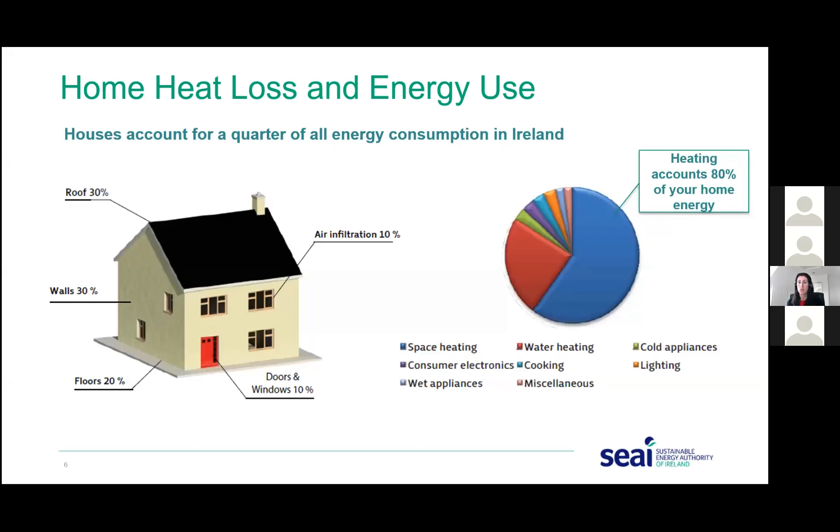In a house with uninsulated attics and walls and underperforming doors and windows, heating accounts for 80% of your home energy. If you have an uninsulated home, you're losing up to 30% of your valuable heat through uninsulated roofs and walls, and a further 10 to 20% through uninsulated floors and underperforming doors and windows.

So you're probably asking, why do I want to do a home energy upgrade? What's in it for me? Well, the number one factor is comfort.

By insulating your home, you're going to make it much warmer and cozier, and you're going to have a healthier living environment. Also, by adding renewables, you're moving to cleaner, more sustainable energy, and all of this is going to have a really positive impact on your pockets.

By really well insulating your home, you're not going to have your heat on as often, so you're reducing your energy bills. As well as that, you're having a positive impact on the environment because you're reducing your home's carbon footprint.

All of this, like with any home upgrade, is going to add value to your home. Even in terms of an energy upgrade, you're improving your BER rating, and that's going to increase the value of your home.

We're often asked by homeowners who don't know where to start, what are the steps to a home energy upgrade? First of all, if you really don't know where to start, it's an assessment. Then it's insulation. And then the third step is adding renewables. I'll go through those in a bit more detail.

So assessment, as I said, if you don't know where to start but you have a cold home that's uninsulated and you want to do something about it, get a BER assessment done on your home. This is the best way for you to find out how your home is performing in terms of energy efficiency and what you can do to improve it.

After the assessment, which is non-intrusive, you're going to get a personalized advisory report. That's going to help you understand the types of energy upgrades best suited for your home, and also the available grants that will help you along your home energy upgrade journey. It's going to provide you with a roadmap to achieving a minimum B2 BER rating.

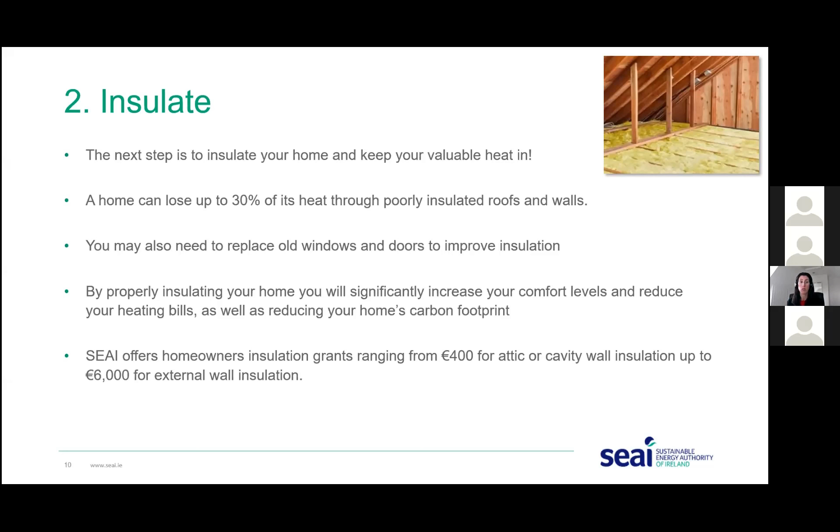And there's a full list of that on our website.

So when you do have a really well insulated home, then you need to consider adding renewable technologies. Renewable technologies are going to further reduce your energy bills and improve the BER rating of your home. It's also supporting that move away from fossil fuels, so you're reducing your home's carbon footprint.

So one of the popular ones that I'm sure you've heard of now are heat pump systems. They're a really good alternative to fossil fuel oil and gas boilers, and they're highly efficient.

And then you can also look at solar PV for generating your own electricity, and that's going to reduce your bills roughly between 200 to 300 euro per year. Obviously, it depends on your energy use, the number of people in the house, the size of the house, so that's an approximation. And then solar thermal for hot water is designed to meet about 50 to 60% of your overall hot water demand.

So all the time, it's reducing your energy bills, moving you towards cleaner energy sources, and again, increasing the value of your house and improving your BER rating.

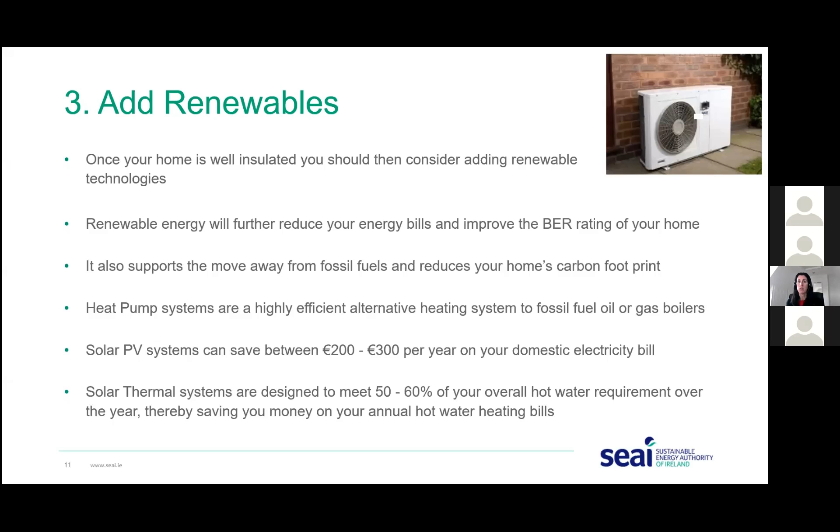So the SEAI offers various routes to getting a home energy upgrade grant. This is to suit homeowners' different needs and requirements.

We do have a free energy upgrade route, and that's for qualifying homeowners that are in receipt of certain welfare payments. There's a list on our website, but it includes the likes of the fuel allowance, domiciliary care allowance, the carers allowance. So do have a look and see if you qualify for that. As I said, it's fully funded by the SEAI, and we manage that entire service.

So what we do is we'll send out somebody to do a home survey, and they'll determine what energy upgrades are required in the home. We always look at insulation first, so it will be looking at your attic space, your walls, and to see what insulation is required.

Case by case, we do look at windows and heating systems, and if we see that there's single glazed windows or there's no heating system, that will be addressed, but it is very much case by case. We assign the contractor to carry out the works, and then we do a follow-up BER. Doing the post-works BER is important to make sure that the grants are achieving their purpose and that they're improving the energy rating of the homes.

Now, if you don't qualify under that route, then we have two other routes. We have what's called the One Stop Shop service. This is a complete home energy upgrade solution. If you actually want to do multiple energy upgrades in one go, it's usually fairly daunting and homeowners like a bit of support, this is probably the option for you.

It's part funded by SEAI, so it covers roughly a third of the cost of works. And the one-stop shop will fully manage the entire project from start to finish, and that includes the grant application.

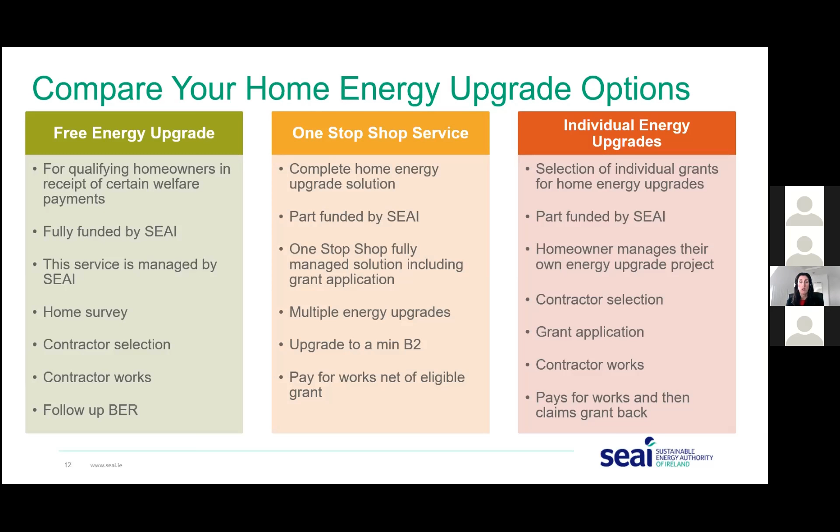You have 8 months to get all the works completed, fill in your paperwork, send it back to us. And once the works are completed, you then claim the grant. So that's the difference. It's really to have those three different routes there to support homeowners depending on their budgets, their situation, and what they want to achieve.

So under the three routes, this just gives you an idea of the various energy upgrades that are available. If I look at the one-stop shop service first, you'll see that it's the full range. Now you can choose what you want, but just to say you do need to meet the B2 requirements.

The one-stop shop will carry out a home energy assessment, including a pre-BER and a further assessment to give you a full plan on what's required to meet that B2. It looks after project management, and then the full range of insulation, whether you want to go the heat pump system and add your renewables. Ventilation is key as you get to a higher BER, to make sure you've got good, healthy ventilation going through the house. So the one-stop shop service covers the whole lot.

Free energy upgrades, again, we do a home energy assessment. It's not a BER, it's a home survey to see what upgrades are required. It fundamentally looks at insulation, number one, and then it'll address certain things like windows and heating systems on a case by case basis.

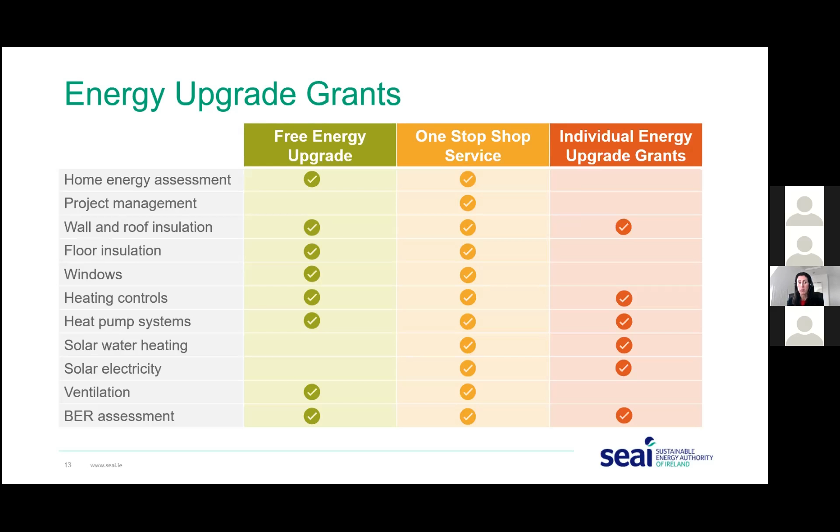And then you have a smaller range of individual energy upgrades, and again, it's covering your insulation, your attic, your wall insulation. Then you can choose whether you want to improve your existing boiler by adding heating controls, or if you want to go down the renewable technology route, you can add your heat pump or your solar thermal and your solar PV.

So to date, we've had over 450,000 homeowners go through the home energy upgrade journey with grants from SEAI. It's really all about making your home comfortable, cozier, reducing those energy bills, increasing the value of your home, and naturally improving your carbon footprint.

So I'll just finish off by saying there's a lot of information there. We've actually got a new landing page on our website: seai.ie/home energy upgrades. There's a huge amount of information to guide you through your home energy upgrade journey and through the details of the different grant routes available, with links to the various one-stop shops and registered contractors. Plus we have a team there, so if you have any questions, give them a call and they can talk you through it.

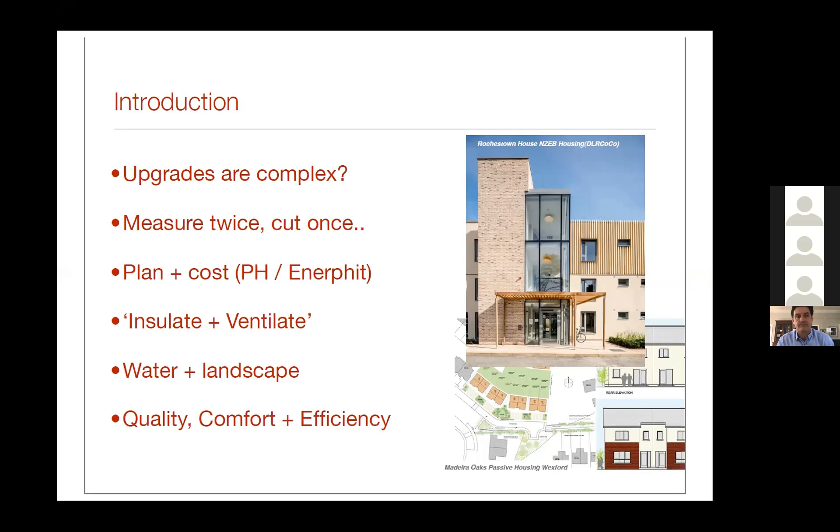So if we go on to the next slide, broadly speaking, in terms of retrofit projects, the supports from the SEAI are excellent. The OneStop Shop initiative is very, very good. When you're coming to manage a project yourself, it gets trickier because you have to negotiate the grants, do tendering and procurement, getting the right contractors. How do you do it?

I'd suggest that, the passive standard, that image there is the passive standard. It's 30 years old. So basically we have a standard that's been operating at this really, really low energy level, helping design buildings for 30 years. It's been audited, measured, double checked.

There's no performance gap. Now the suite of design aids you have here for your design team is absolutely brilliant. When you model this, the modeling done for the passive house system is very exact and very rigorous. To actually use the modeling and systems they have is a massive benefit to any design team or anyone doing a project.

Even if you're not going for the standard, it doesn't matter. But if it says you're going to use a certain amount of energy after doing X, Y, and Z, there's no performance gap at all.

So for larger projects, I would absolutely get your passive house modeling done. And if you have your own design team, your own architect, engineers, quantity surveyors, etc. doing your project, getting a passive house consultant involved is probably less than 1% of your construction costs. So it's negligible here, but it's a brilliant aid to tell you exactly how this is going to work.

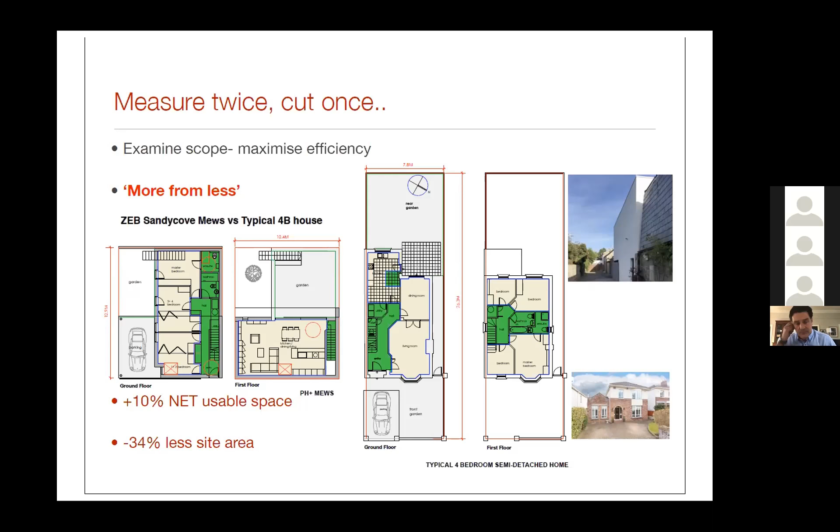It's really important, particularly for extensions, to make sure your scope is right. Don't build the biggest thing you want - build the most efficient thing you can on your site.

There's a couple of headings people normally look at. This is a view from the upper floor roof terrace, which faces south - you can see we have a very large south-facing glazing screen there. The main garden space on this was upstairs in this enclosed courtyard. There's effectively no - the ground floor courtyard bedrooms look into it, and there's a car parking space, and the upstairs amenity space is upstairs here.

One other aspect in terms of design was I was very keen to see how far we could go on a really tight urban site, so there's no compromise really on aesthetics - the renewables here are almost invisible as well. One of the key questions is: what's my payback for doing A, B, or C? Really, the question you should be asking is what are the opportunities if you're doing a large scale upgrade - you should be aiming for an A rating because it's no extra cost.

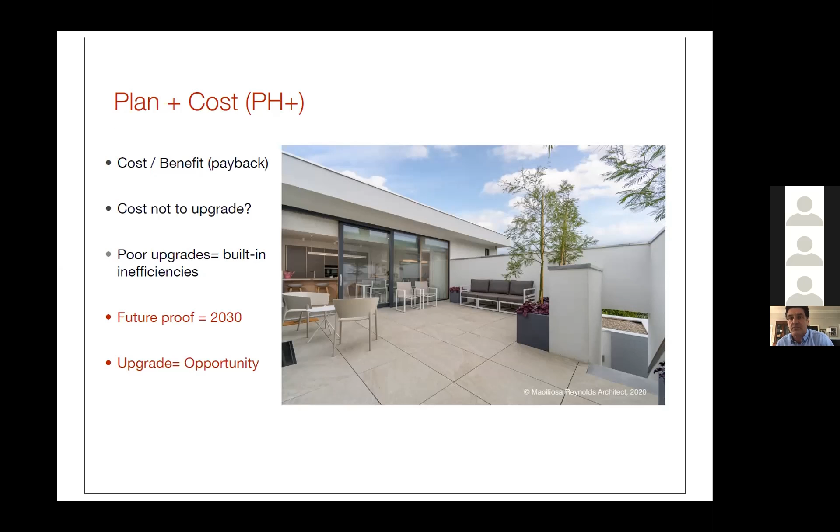There are certain things like air tightness and making your building more insulated, but air tightness is critical - that's really difficult to do later on. For example, on this one we put in rainwater harvesting because we physically couldn't put in the tank later - it was so big, there was no space for it. So there are some things that would be very expensive for you to do later on that may not make a huge amount of sense at this stage, but it's the cost to retrofit those later.

So in terms of your insulation, once you're aiming for an A rating on your retrofit, your ventilation and your insulation go hand in hand. So you need to model the two.

I just put up these two slides here. This one is of the living room upstairs, which is an open plan living room, and the other one is of a typical bedroom. This is almost like spot the bulb, where you'd want to see where is your heating system. In a normal room, you see your radiators, underfloor system, you might see a stat on the wall. On this one, it's an airborne centralized ventilation system.

So the extract is a small little circle over where the hob and cooker is in the kitchen. On the bottom left of the slide, under the table, there is the air intake for the living room. And then you have your air supply to your bedrooms right where the little hand is as well.

So the space heating is very, very, very low level. You don't need a huge amount of it. But what you do get, the air quality is absolutely brilliant.

Now, one of the things a lot of people will say is, oh, for passive houses, you can't open the windows and doors. That's absolute rubbish. You operate your house as normal. In winter, you're looking at bedroom temperatures of 18 degrees and living room temperatures of 21 degrees all day, 24 hours a day, and the air quality is filtered.

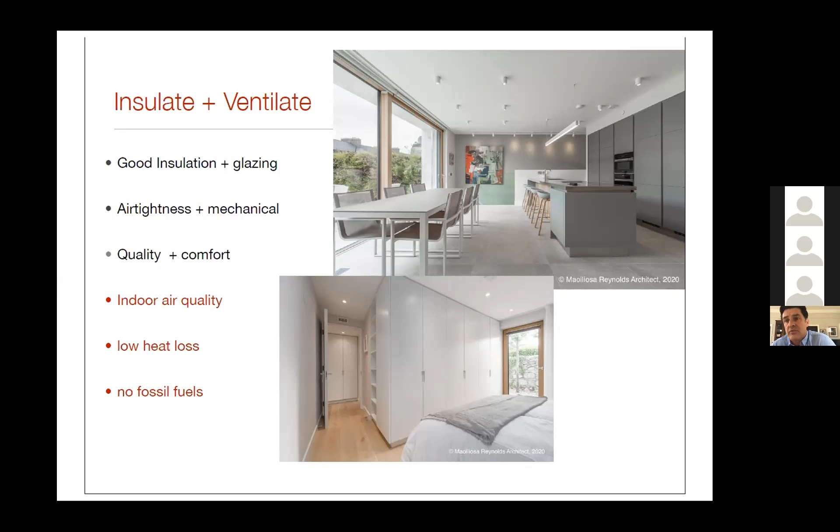Next slide there please. So then the other aspects you want to look at are your appliances, your plug-in loads. I know Katie will be talking about this a little bit later on, but we did a full demand control model on this, looking at appliance loads, when we would be using them, your total energy use, hot water, etc. So A++ rated appliances, low flow fittings are very important.

We put in rainwater harvesting because there's a chance this will come back in, we'll get water charges later on, and 30% of your treated water is being used to flush toilets. It makes no sense whatsoever. So we do have rainwater harvesting here for toilets.

We also have, there was no space for a garden, so what we did was we put in a living wall here. The top slide, you can see it. Plants were chosen for biodiversity, for bees, and there are bats nearby as well. I didn't tell my wife that at the time, but we have strawberry plants in there as well. So it's not only a feature, but it's a functional feature as well in the whole project.

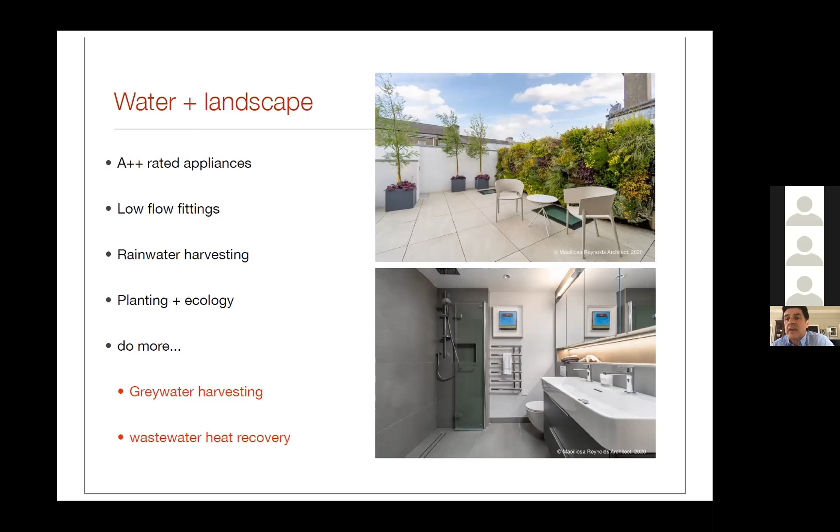You can do more. There were opportunities I left behind in this in terms of embodied carbon - Pat will talk about that later on. But you can also do grey water harvesting, which is using sink water to flush your toilets, and then use your rainwater harvesting for other things. You can also do wastewater heat recovery, where hot water from your showers doesn't mix, but preheats cold water coming in. That can reduce your hot water use again by 30%.

Next slide there please. So in terms of renewables, as was said earlier, your first port of call is energy efficiency and insulating and ventilating correctly. Then you look at renewables, because you really want to get the bang for your buck from that.

In this project, I luckily had a neighbour of mine, Tim Cooper, who's been involved in renewables for many years. He did the green building in Temple Bar 26 years ago, and this really fit in with his research at the time, so he volunteered to do a demand control model on the project.

The difficulty with renewables is, if you can get your energy efficiency down, you're really getting a bang for your buck from it. The second biggest load you'll have in your house is hot water, so we did an awful lot of modeling on this. We looked at the cost of the house without PV - the total energy cost, including plug-in loads, was about 1,700 euros a year, which is very low. When you put your PV on the roof, it dropped to about 1,000 euros.

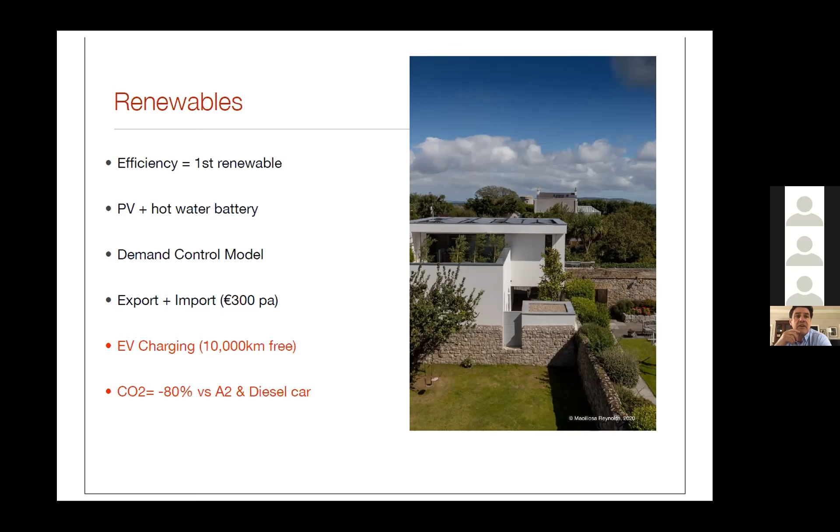If you want to go, I think a larger scale retrofit is an opportunity to go further, to hit the A level. If you use something like the passive standard, they've been doing this for years, you've no performance gap, you get the quality control of the standard, and it's an absolutely brilliant design tool. It allows you to alter your specification and see - do I need this, do I need that, what happens when I change a different material.

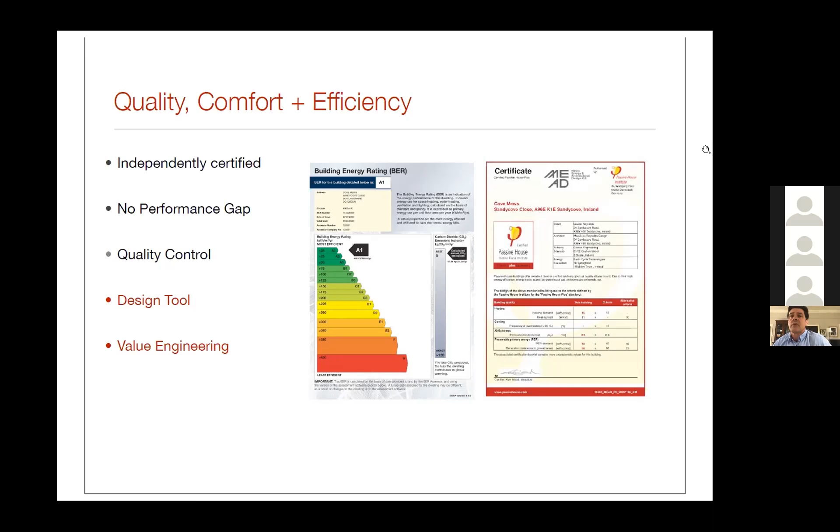Just two examples of retrofits - these are the last two slides. We have an A1 refurbishment, that's to the Enerphit standard on the top slide. That was a 1930 semi-D that we finished about a year ago. It has unbelievable energy performance and air quality. It was a 2-story gable extension, single story to the rear. The extra over cost to get this to the A1 standard was 4,000 euros.

That's it. And the one down below is one we're doing at the moment, going to be Enerphit. That's a mid-terrace red brick exempted development.

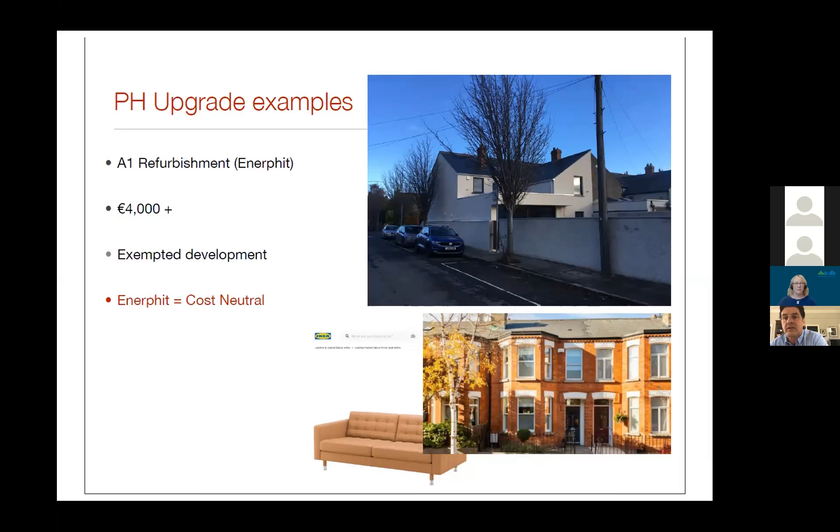These are some of the progress slides I took on Friday. You can see we're using a decentralized mechanical system to ventilate the house, like little standalone vents, your heat pump out the back. That's a little snapshot of your external insulation. We're getting this building airtight down to about 1.5 air changes an hour, so they don't need radiators upstairs, just underfloor downstairs. It's going to be a 3-story, and the attic was already converted.

If you're looking at energy retrofits purely for that, the one-stop shop is the way I'd go. If you're doing a larger job, you have an opportunity to get to the A standard using these established methods and skills that are out there very easily at negligible extra cost. I'd urge everyone not to lose that opportunity. If you're in a new house doing a lot of work, new kitchen, new bathrooms, extending it, get to the A rate, that's what you should be targeting.

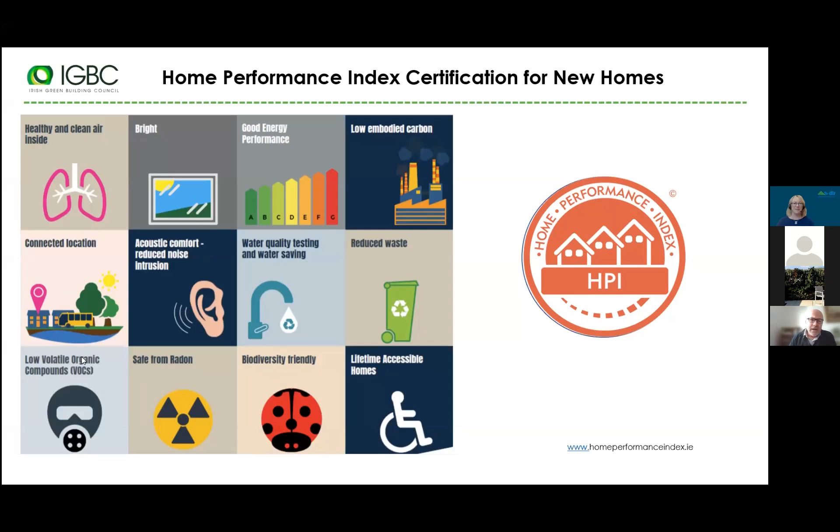This currently is only for new homes, but all of the same indicators can be applied to existing homes. If you look at the building regulations and BER, it's only looking at energy efficiency of certain elements within the home, such as heating, hot water, and lighting. Whereas we're looking at everything from the carbon emissions associated, to water efficiency, to daylight levels, acoustic comfort, embodied carbon.

Right through to biodiversity, and particularly things like connected location — how far you will have to travel, will you need to own a car if you live in that particular home — which has a massive carbon impact on our carbon footprint.

There may not be an awful lot you can do about the connectivity of how well connected your home is, because over the next 8 years we need to transition to the 15-minute city. That means being able to get around by walking and cycling, and we all have to ditch the car. I don't think going to electric cars in urban areas is enough, because they create as many problems as they solve in terms of the space they take up.

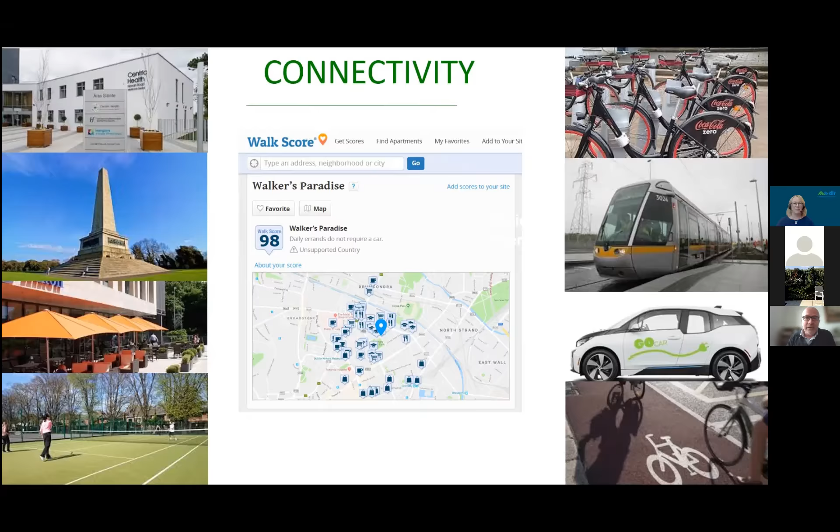Even if you have an electric car, it has to be parked somewhere. It requires 6 or 7 other car spaces elsewhere in order for you to be able to drive from your home to wherever you're going, and that in itself creates issues with flood resilience and biodiversity. So really, what we need to be getting to over the next 8 years is a 75% cut in car ownership within Dublin and its environs.

And this is now possible. We have car sharing clubs that are available. I've given up my car over the past 3 years and saved a ton of money, enough to retrofit my home to a B2. So if you need a financial strategy to retrofit your home, that should be maybe where you think of starting.

And then, we mentioned already water efficiency. Water efficiency is something that's a little bit overlooked. In fact, as Susan Andrews showed earlier, it's responsible for about 25% of energy use in your home. So the simplest, cheapest way of dealing with that is to buy a €10 low flow shower head. They're really well designed now — you'll get really good water pressure through that, but it'll be using a fraction of the water that you use.

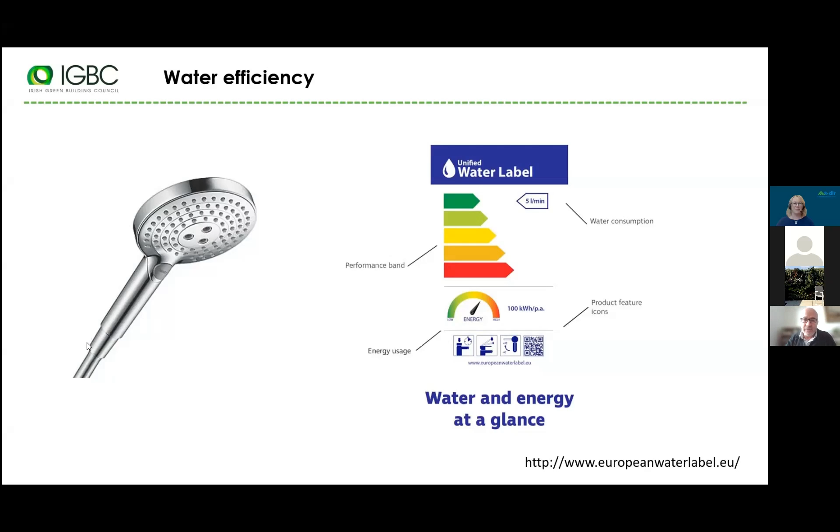In fact, we've started a campaign to bathroom showrooms to really start communicating this. There is a thing called the European Unified Water Label that gives a rating for each tap, for each shower head. Bathroom showrooms should be displaying this. We're doing a campaign to get them to show this with every sanitary ware, because this is probably one of the cheapest things you can do to cut your energy consumption. It'll cost you nothing, relatively speaking.

The other part, we talked about one-stop shops and different ways of renovating your homes. Now, as we're aware, not everybody can afford to do a renovation in one go. I suppose it's akin to what I've been doing with my home over the past couple of years, doing it bit by bit.

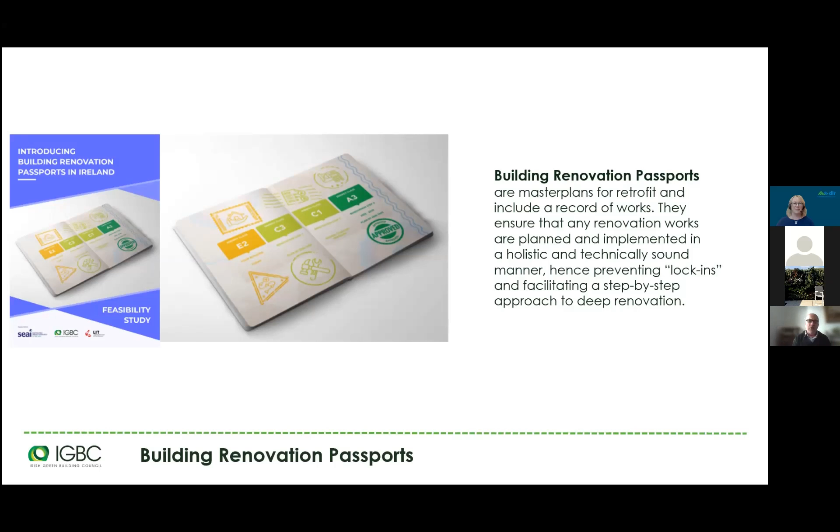This is where it makes sense for homeowners to hire an expert. Susan Andrews mentioned that you can get a building energy rating advisory report, and that will give you a fairly generic plan for your home, but it's probably not sufficient for what most people need. What most people need is a fairly detailed plan of works for their home, because your home may have issues like water ingress or structural issues, and they all have to be dealt with first. So what you really need is somebody who can come and have a look at your home, see what needs to be fixed first, and then set out a plan over the next 5 or 10 years, depending on how much money you have, that avoids lock-in, so you can carry out certain measures and then move on to the next measure without having to undo the previous measure.

Perhaps in the second year you could look at dealing with the roof. That can be done as a separate thing, so long as you work out how you're going to connect the roof insulation and the air tightness to the walls. In the third year, then you could look at doing the external walls. Now you will need to do windows and insulation together, because the windows need to be connected to the insulation if you're doing external insulation.

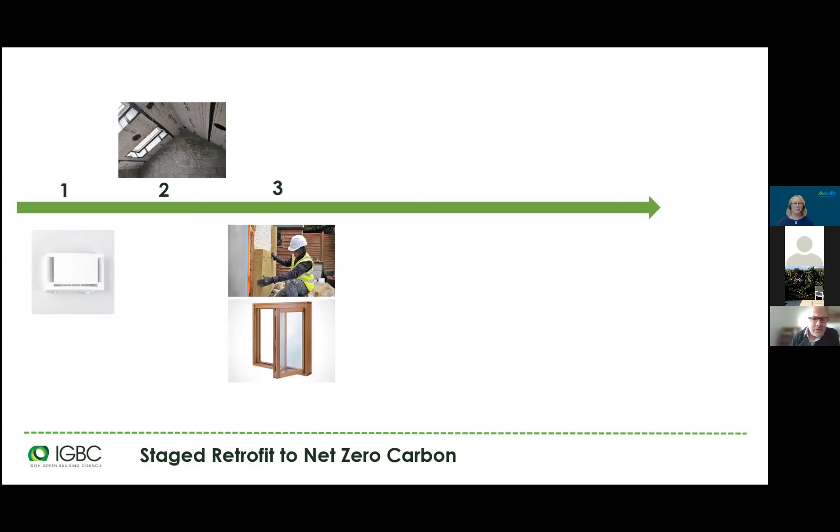So the first three measures here will have gotten your energy loads down low enough so that you'll be able to fit a low carbon source of heat, such as a heat pump. Heat pumps won't work by just putting them into the house without the insulation reducing the heat demand first. So you have to get all of those steps right. Then you'll be on a route to decarbonisation, because the electricity grid will decarbonise, so even if you don't do anything more, your house will slowly be less carbon intensive over the next few years.

But by adding, say, solar panels, we can go a step further. Now we've got right down to a very low residual load, and we can look at offsetting and getting to a net zero carbon, to really get into a net zero carbon retrofit.

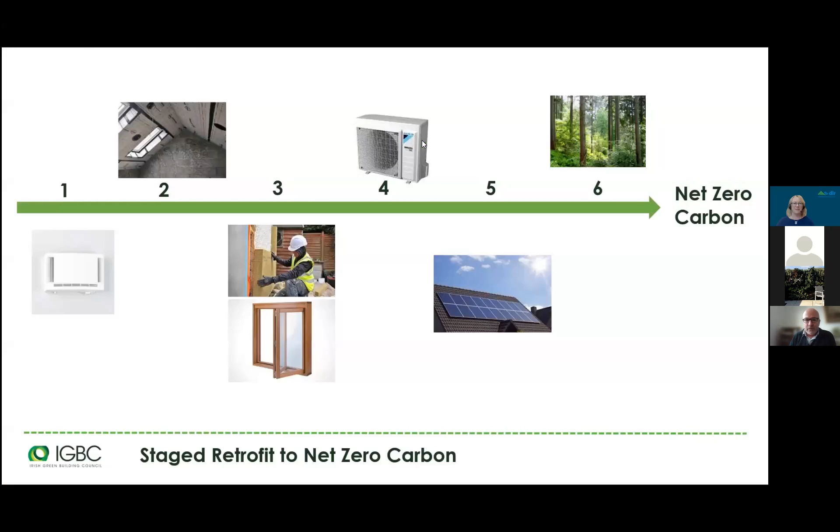Sorry, I did miss out on one particular slide. The one thing we also need to consider when carrying out a renovation is the impact of doing it. Mel Reynolds talked earlier about the impact of building very large houses. It's important to remember, if we are doing an extension at the same time as the renovation, every square metre of that extension will typically take about half a tonne of carbon to build. So if we're building a 100 square metre extension onto our house, that's 50 tonnes of carbon up front before it's even occupied. We need to be aware of this, because there's no point adding a highly carbon intensive extension while trying to reduce our overall carbon consumption.

So it's really important that we actually evaluate what we have already and see if that's enough. With my own house, I actually knocked down an extension because it was blocking light into the main house, so I reduced the overall footprint of the house. That also made it much easier to renovate, because I didn't have complicated add-ons that all needed to be insulated and would add to the cost. So this is something we need to be aware of. And just a word on embodied carbon.

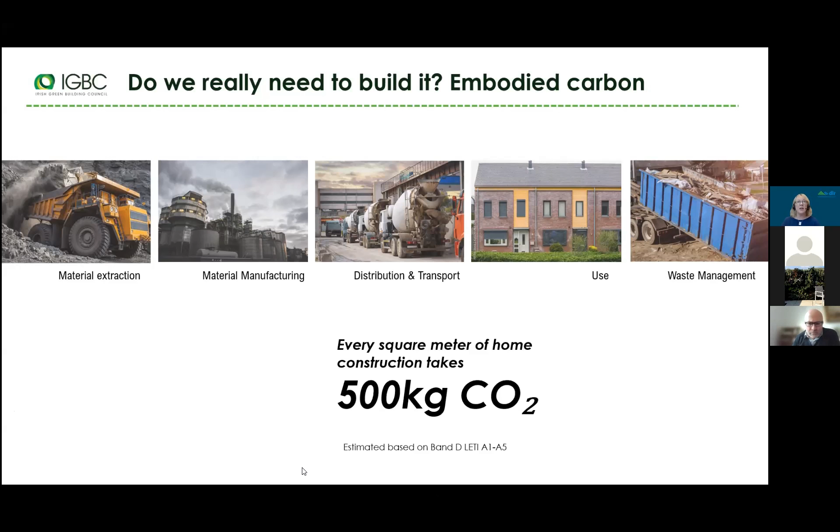Our next speaker now is Mike O'Rourke from Electric Ireland Superhomes. Mike is a senior retrofit engineer with Electric Ireland Superhomes, the independent OneStop Shop service for energy upgrades in the residential sector. Mike studied in Dublin Institute of Technology and University College Dublin and has over 30 years of varied experience in building services engineering. For the last 16 years he's specifically worked in the renewable energy and retrofit sector in Ireland, with experience in the design and project management of retrofit installations and whole house energy retrofits across a variety of homes. Thanks very much, and over to you now, Mike.

Good morning, everybody. How are you doing? I'm not going to get too deep into the technical side.

Pat and Mel have both covered this very well this morning. I will touch on some areas. What I'm mainly going to look at is how you can benefit from the use of a one-stop shop to do your home energy upgrade.

I'm assuming you can see the screen okay there at the moment. Let me know if not. So I'll quickly tell you... Yeah, sorry, we're not seeing your screen. Are you okay? Give me one second. Yep, we can see it now. Thank you, okay, thanks.

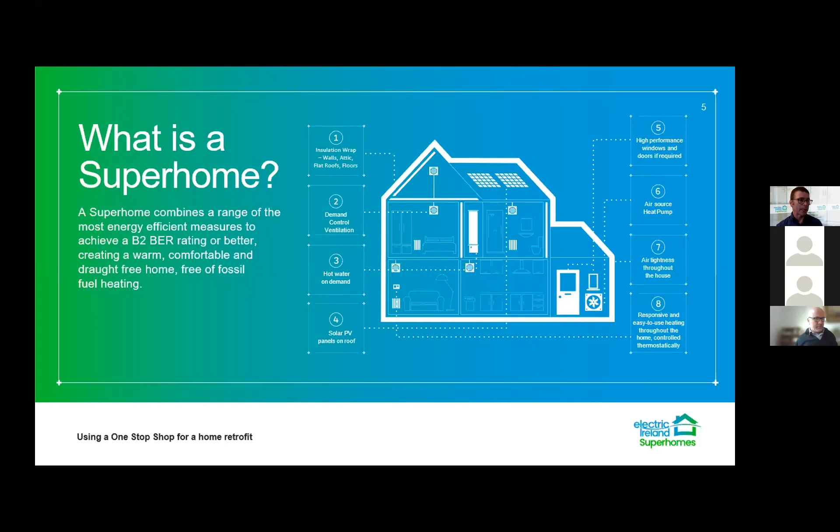So again, that's just an overview of the insulating, air tightness, ventilation, heat pump, and in some cases solar photovoltaic approach.

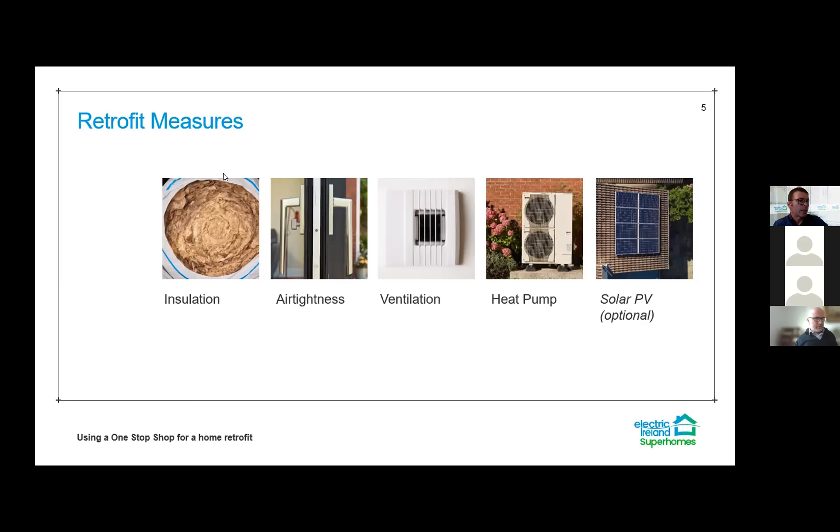Sorry, my slides are jumping ahead a little bit.

So the journey or steps we take a homeowner on when you start dealing with us as a one-stop shop - the first step is an initial consultation, usually set up as a video or telephone consultation, to go through the basics of your house and get a sense of the type of house, the size, what work may have been done so far to improve energy efficiency, and what possibly remains to be done. The main goal of that consultation is to get that broad sense of the type of house, but also to discuss with the homeowner what they are open to doing and what they're not open to doing.

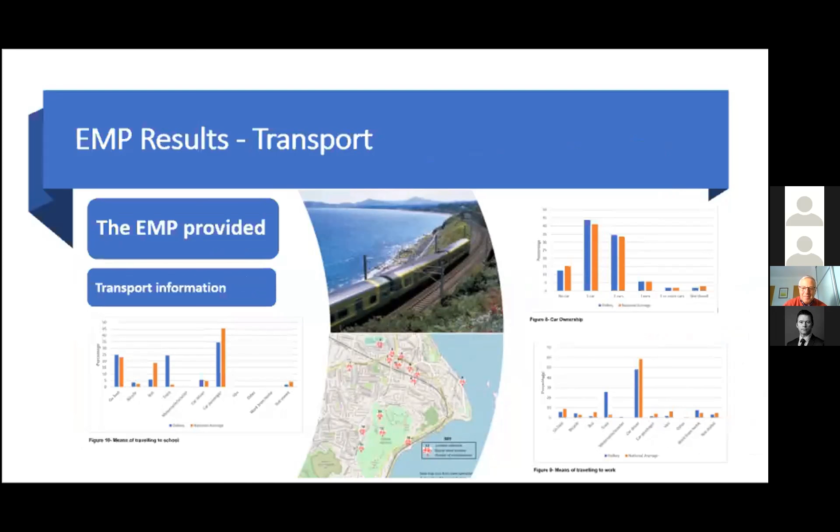The EMP is not just about buildings. We've also examined the number 2 consumer of energy, that's transport, and we've looked at the green energy generation opportunities there might be in the area. I'm not going to talk about these today, but just to say they're not ignored, and we certainly intend to use them in future projects.

Now switching to engaging the community. This is hugely important. We wanted the community to know what we're about. So we organized a Save Energy at Home show in the local town hall. We had exhibitors promoting things like insulation options, EV chargers, electric bikes, solar panels, etc.

We also wanted to engage all age groups in the show, from children to senior citizens. So in addition to talks given at the show by SEAI and other energy experts, we had a transition year student presenting on youth perspectives on energy conservation.

To entice families along, we also ran, very cunningly, a children's art competition in the national schools. We got 9 local businesses to sponsor prizes. We got local artists to judge the entries, and the winners were to be announced at the show.

And of course, this caused the children to drag their parents in, kicking and screaming to see if the kids had won. But it also meant that the parents saw what was happening in the show, and hopefully whetted their appetite to maybe do something to improve the comfort of their homes, save money, and also contribute to saving on carbon going into the atmosphere.

The other activities we've done include running a switch and save campaign to encourage local residents to review their energy bills and save money by swapping energy providers, and when swapping, try to choose a provider that offers renewable energy sources so that you're actually saving on carbon dioxide there as well.

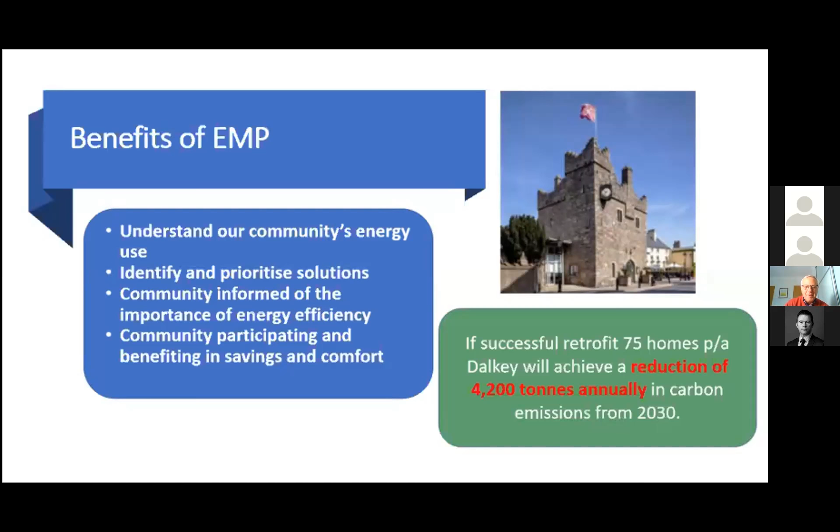So what's the next stage? Well, the next stage is we have to get these retrofits going, and we can't do this ourselves. So we will be appointing a one-stop shop for our community actions. They'll do all the work of applying for grants, project management, and ensuring compliance. Just to say, the Energy Master Plan is not set in stone.

It's an evolving document, and we will certainly look more at the transport opportunities and get projects going there, and other things such as microgeneration or community sharing of solar energy. Through this ongoing process, we would hope that we can drum up support in the community and get people actually partaking in these projects, and possibly even achieve a greater CO2 emission reduction for Dalkey in the end.

So I hope you found this very brief and rapid overview of what we'll be doing on this community project helpful, and I'd be glad to answer any questions in the Q&A session. Thanks for your interest.

Great. Thanks a million, Paul. Sorry, I was just trying to find my mouse there for a second.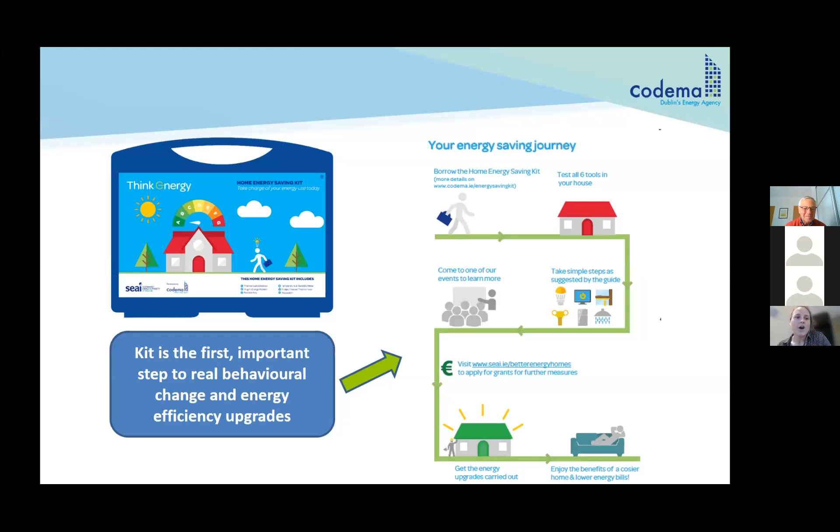The Home Energy Saving Kit aims to tackle home energy upgrades. A common piece of advice is to get an idea of the current energy efficiency of your home and the energy that you're currently using and maybe wasting. The Home Energy Saving Kit can really help with this first step.

The tools have a dual function in making you more aware of your home's energy use, and then helping you identify areas for improvement. For example, your house may have walls that need better insulation, or electrical appliances that are driving up your bills. It won't solve all energy issues overnight, but it's a stepping stone and an excellent starting point to initiate awareness around energy usage in the home.

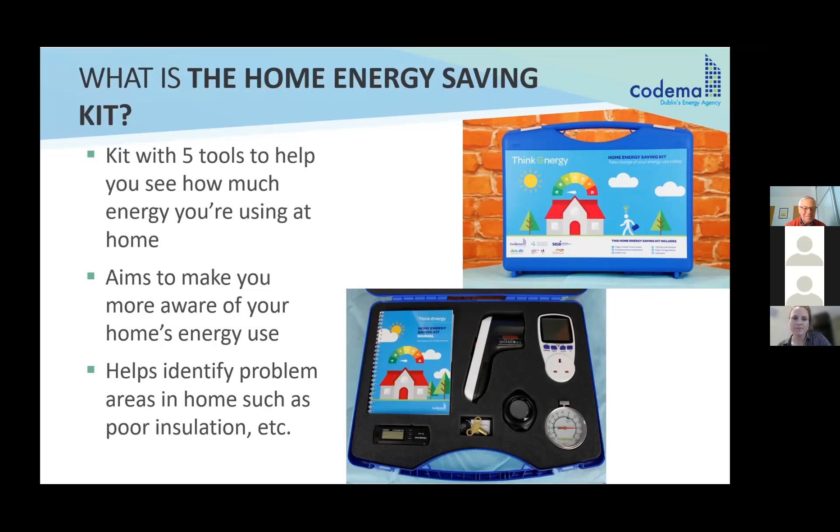So what's in the kit? We have a thermal leak detector, a plug-in energy monitor, a temperature and humidity meter, a radiator key, a fridge freezer thermometer, a water flow rate exercise, and of course the all-important user manual.

Looking at our first tool, this is a thermal leak detector, and this tool allows you to measure the temperature of your walls, floors, around windows and doors, your ceiling and so on, to spot if you have any heat escaping or cold air drafts in your home.

It's a very easy tool to use. It uses an LED colored spotlight which changes color when it picks up on a change in temperature. For example, if your windows aren't sealed properly, it will switch from a green light to a blue light to show a cold air draft coming in, and switch from green to red to show heat escaping. So it's great for identifying areas in your home that need better draft proofing or more insulation.

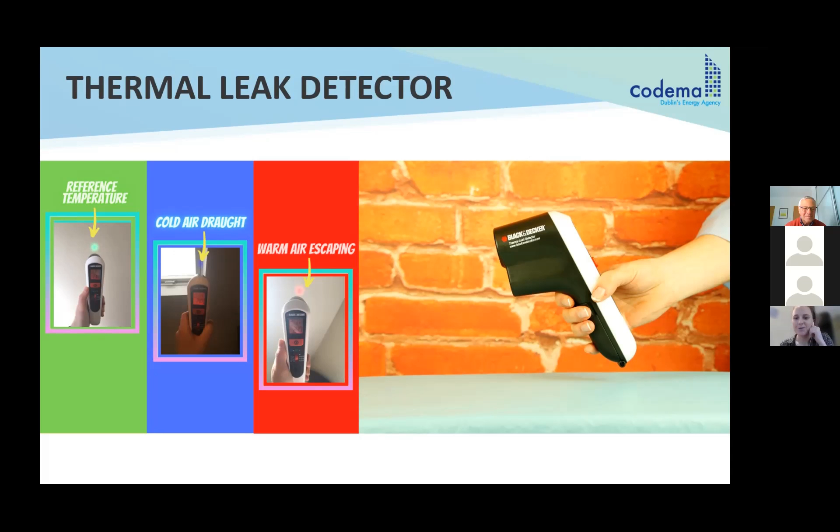As you can see from the picture on the screen, I used it in my converted home office and found both drafts and thermal air leaks. So a bit of work to be done there.

The next tool in the kit is our temperature and humidity meter. This allows you to check if your home is at the ideal temperature, which is 18 to 20 degrees for occupied spaces like your kitchen and living room, and 15 to 18 degrees for places like your bedroom where you might not spend as much time during the day. The ideal humidity level is 40 to 60%. Any higher than this, you may be experiencing problems with damp and mold, so it's really important to understand and rectify this straight away.

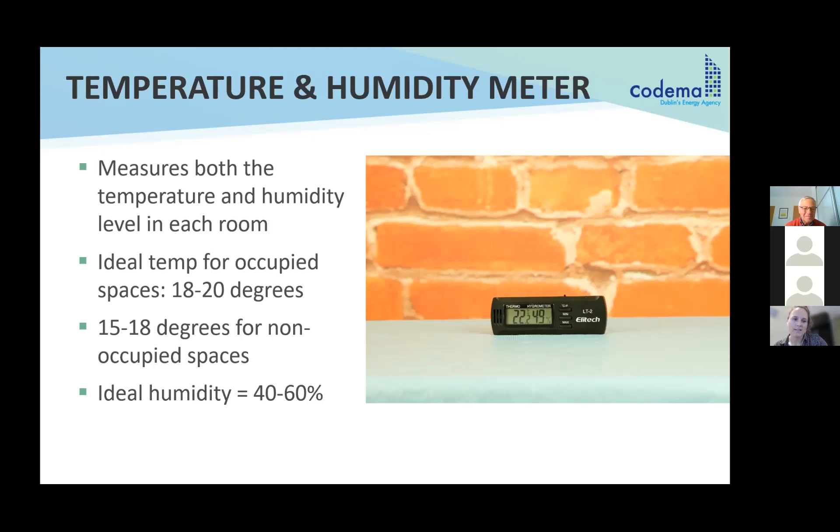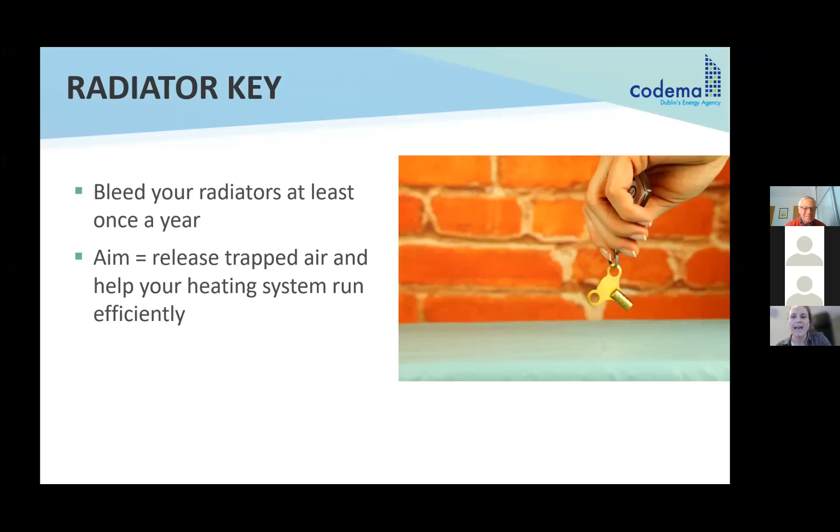The next tool is our radiator key, which allows you to bleed radiators in the home if you have a wet central heating system. It releases any trapped air to make sure your heating system is working as efficiently as possible.

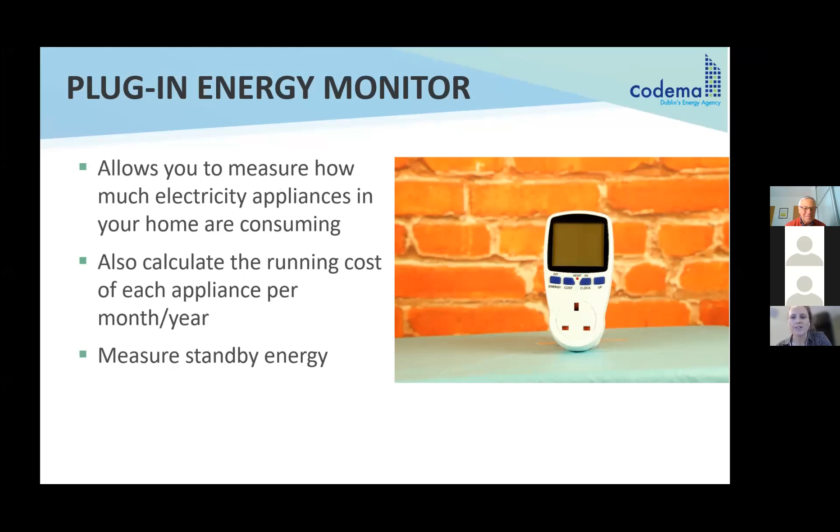Our next tool is the plug-in energy monitor, and this allows you to measure the amount of electricity your appliances are using, from your kettle and laptop to maybe your hairdryer and phone charger, so you can work out how much each appliance is costing your household. It's also a great way to identify bad habits in the home.

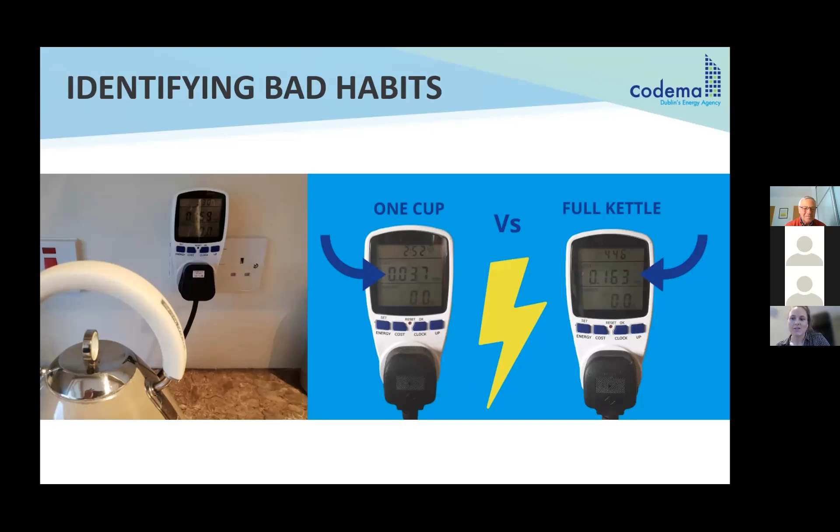For example, I recently did a test comparing the electricity needed to boil a full kettle versus boiling enough water for just one cup of tea. I calculated that filling the kettle full every time we wanted a cup of tea would add about €50 to our energy bill at the end of the year. So you can imagine the savings you could make by testing this out around your home with other appliances.

Moving on to the fridge freezer thermometer that's in the kit. Very simply, this tool allows you to make sure your fridge and freezer are at the most efficient temperature setting, that's 3 to 5 degrees for your fridge and -15 to -18 degrees for your freezer.

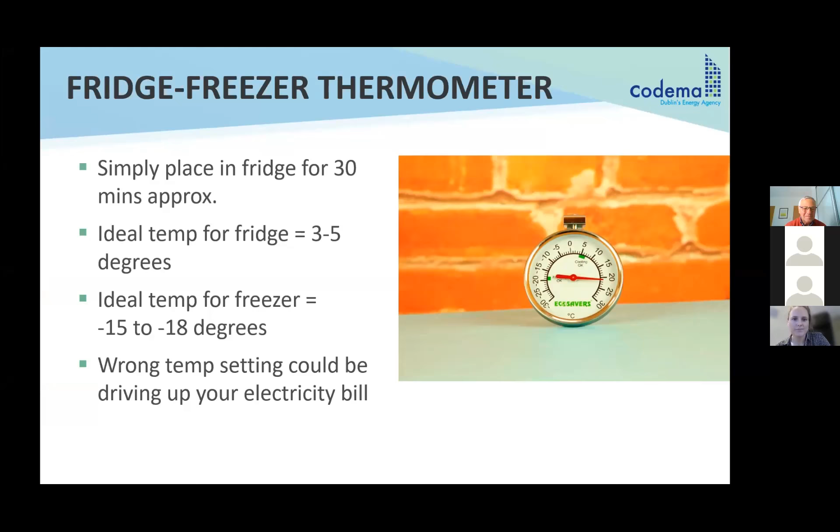Any colder than this, you could be using unnecessary energy to cool your fridge and freezer. You just pop the thermometer into the fridge and freezer for 30 minutes, and if you find the temperature is not at the most efficient setting, just adjust it using the dial inside your fridge.

We have one final exercise you can carry out with the kit, and that's how to measure the flow rate of your water coming from your shower head and taps. An ideal flow rate is about 9 litres per minute, but in many houses, particularly older ones, the flow rate can be as high as 18 to 22 litres a minute, which wastes a lot of water and a lot of energy heating that water. The exercise in the kit lets you measure the flow rate, and provides tips on how to rectify this, such as purchasing low flow shower heads and aerated faucets for your taps.